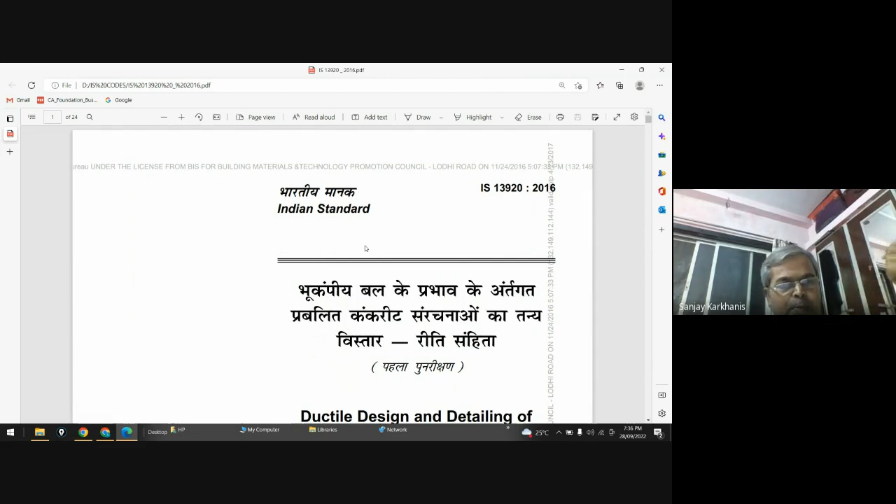So okay, let me see, it is somewhere here. This is 1893 and this is 13920. Okay. I think all of you may be looking. Yeah, this is Indian Standard IS 13920 2016. So that means in the year 2016, the recent development in that has been carried out. So you can see now. It is regarding ductile design and detailing of reinforced concrete structures subjected to seismic forces, and it's a code of practice as per Indian standards.

Okay, that means this whole thing will be directing you how to detail the reinforced concrete structure which is subjected to seismic forces. That means it is not talking anything about how to calculate the seismic criteria, etc. All that you will get in 1893. Okay. So ductile design and detailing. That means after your analysis, you will design the building, that means you will design the size of column, size of beam, then a layout, etc. Then you will give the reinforcement detailing and what will be the requirements for detailing. Clear? Yes or no? Yes, sir.

Yes, sir. So there is a basic difference between 1893 and 13920, because 1893 will let you know what are the codal provisions when you are supposed to create a structure for analysis for resisting the seismic forces. Okay, and this will give you, after analysis with the help of codal provision of 1893.

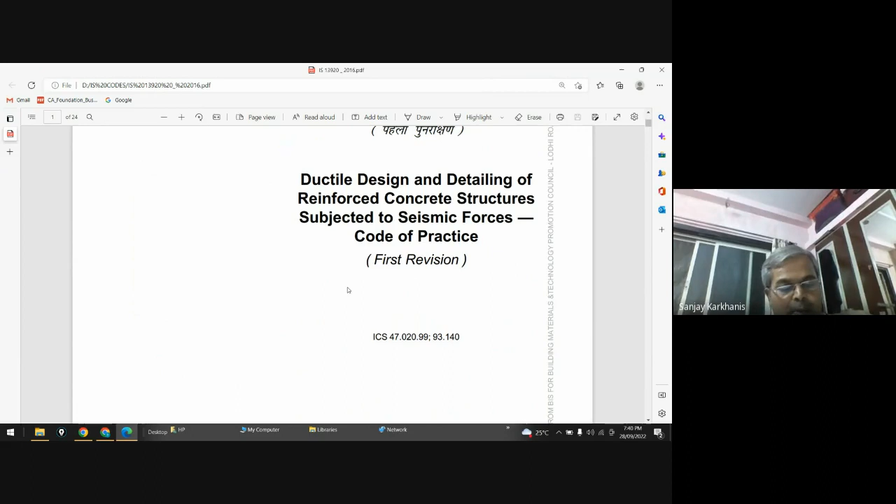Yes, clear, sir. Yeah, so if you are using R equal to 5, then you have to follow all these codal provisions, because unless and until you follow these codal provisions, your building will not perform in a ductile manner. It may perform in any other manner, that is brittle. It may get collapsed because you're designing the building for lesser base shear.

Clear? Yes, sir. And that is the first important thing, because I have seen a lot of people using R equal to 5, but they do not take care to design. They just follow the elastic manner design, where in elastic zone we say that the moment the force is removed, the building will come to its equilibrium position. That means there will be no damage. But here, because of R equal to 5 or R equal to 3, whatever R you are providing, in your assumptions itself you are saying that I'm not going to design the building to behave in elastic manner for 3 criteria.

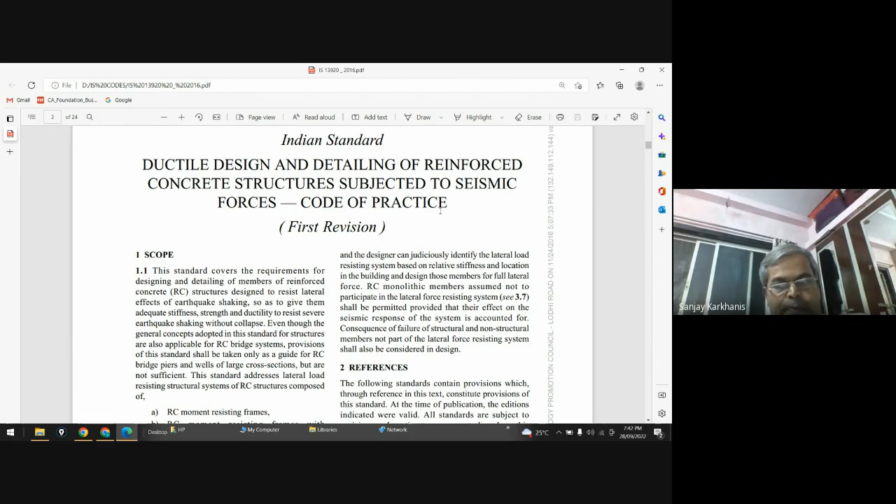So in the minor criteria, if the building is subjected to a minor earthquake, then it will behave in elastic manner. When it is resisting a moderate earthquake, some sort of damages I am accepting. And even if it is supposed to resist the severe earthquake, structural damage is also accepted, but collapse is prevented, right? Hello. Yes, sir. Yeah, and that's why there is a connection: the moment you use R equal to 5 in your calculation, you are supposed to follow all these codal provisions.

Now you can go through the scope, and you can see: provisions of this standard shall be adopted in all lateral load resisting systems of RC structures located in zone number 3, 4, and 5. That means the standard is optional in seismic zone 2. So in a low seismic activity zone, code says that you may follow these standards, or depending on your situation, you may keep it optional. But in zone number 3, 4, and 5, you are bound to follow these codal provisions.

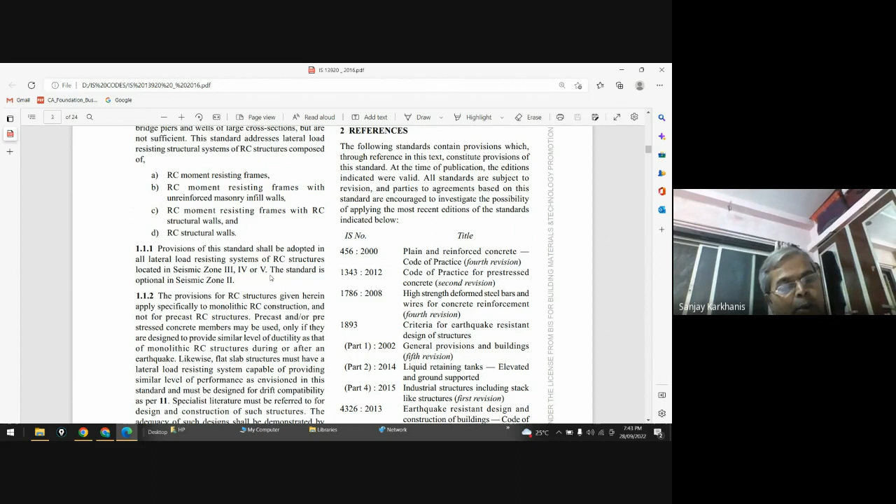Code says we do not make any prejudgment of what will happen when the building is subjected to moderate or severe earthquake. Building may perform in any haphazard manner, and it may be subjected to collapse. Okay. Then you can see the provisions for RC structures given herein. You can read all these things. That is simple. And these are, again, the references. Along with all these references, you have to read these codal provisions.

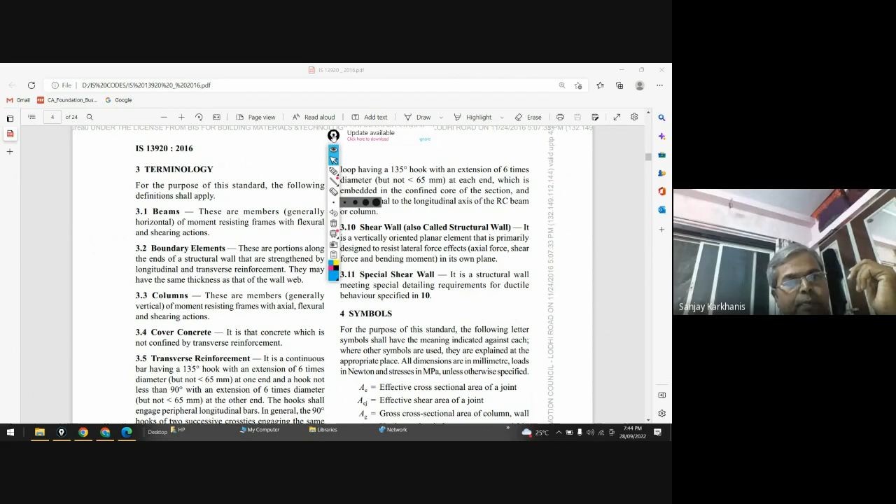Okay. Now this terminology, and this is very important. People do not read it, but I don't know why. You can see the first is about beam, and as per this standard, how the beam is defined. These are the members, generally horizontal. That doesn't mean that there may not be any other inclined type of beam. Generally horizontal, of moment resisting frames with flexural and shear actions. Yes, clear hua hai iska meaning? Yes, sir.

That means even if I have a member something like this, and this member is subjected to such lateral forces, it will be considered as beam. Or let's say this is your beam. Now this beam is subjected to lateral forces, maybe of any type, and it is predominantly resisting with flexural action and not axial load. Okay, now you can understand that.

Then boundary element. Now these boundary elements are in shear walls, which are vertical. We will go into that. These are the walls that are strengthened by longitudinal and transverse reinforcement. They may have the same thickness, or they may have additional extra thickness. That means if in plan I draw this as a shear wall, there will be a boundary element somewhere here, and there may be a boundary element somewhere here. So these are the two boundary elements. They may have a thickness as the thickness of wall, or they may have more thickness.

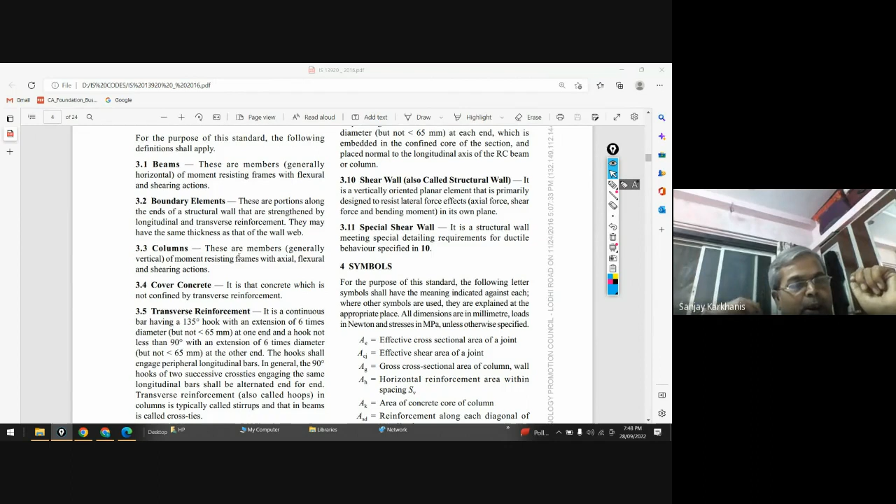Then you can see columns. These are the members, generally vertical, of the moment resisting frames with axial, flexural, and shearing actions. That means the column will be subjected to axial force, flexural action, and shearing action. All those members in the moment resisting frame will be considered as columns, and the members which are only subjected to flexural and shearing action will be considered as beams.

Okay, then cover concrete you can go through, and transverse reinforcement you can go through.

Now, gravity columns in buildings. You can say that all columns will carry the gravity loads. Then why is this special consideration? It is a column which is not part of the lateral load resisting system, and is designed only for force actions, that is axial force, shear force, and bending moment due to gravity loads only. But it should be able to resist the gravity loads at the lateral displacement imposed by the earthquake forces.

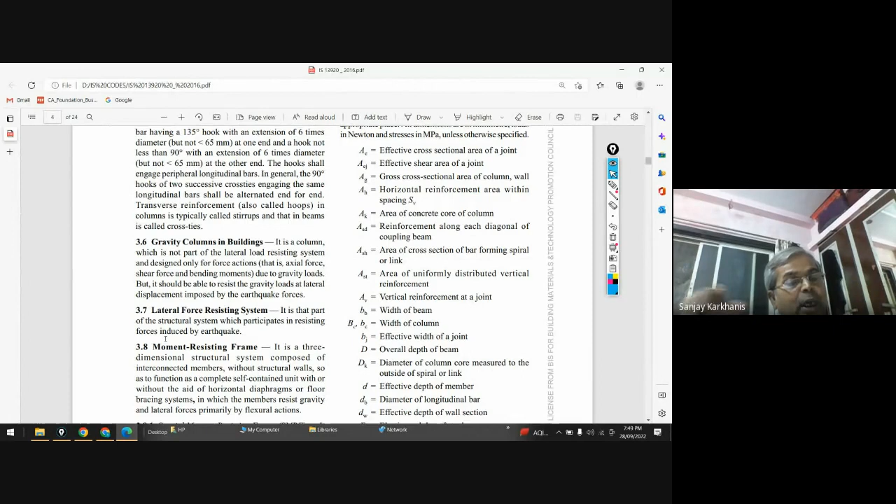So in high-rise structures, some columns you may consider only to resist the gravity loads. They are not part and parcel of the lateral load resisting system. Clear, or do you need a bit of explanation? Yes, sir, we need that.

See, this is your entire building. Let's say this is the plan of your entire building. Then there will be some cores, you can say these are the cores, and there will be some lateral columns over here, maybe some columns over there, I'm just drawing some columns. Now all these periphery columns, along with this lateral load and this shear wall, you will have a structure which is connected.

So this inner core wall is connected to all these lateral load resisting systems. Let's say it is connected, and there may be a few columns, these are the columns, but I have a choice that I will say these columns will resist only gravity loads. They are not going to resist any lateral load in this direction or in this direction, because lateral loads will be coming at the floor level, and this floor level, with the connected beams, will transfer the load onto these lateral load system vertical elements, these columns, then this wall.

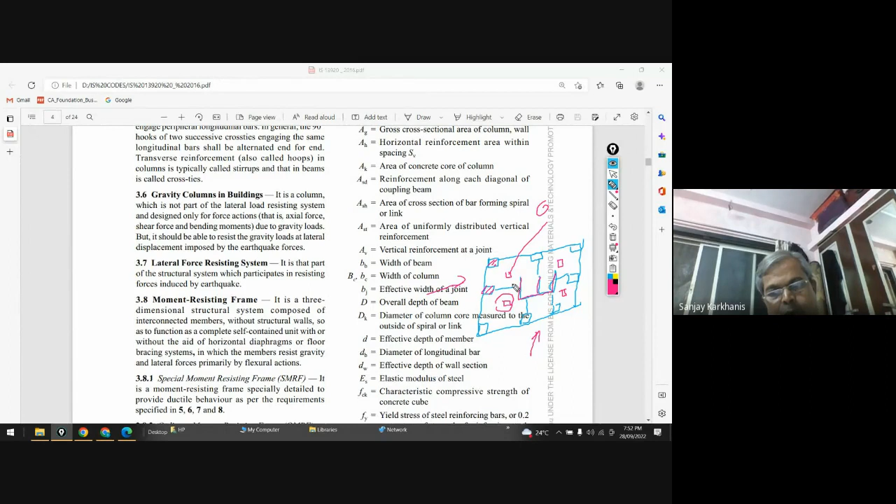But these columns may not contribute to transferring any lateral load. They are good for gravity loads; they will transfer the gravity loads to the foundations, but they will not take part in the resisting system. So that is called a gravity column. Clear? Yes, sir.

Now the reason behind that, let's say you're having a 50-story structure, and if all the columns you're creating are supposed to resist the lateral loads, then the sizing of the inner columns will be very high, and that will obstruct your architectural use or access, etc. So the system is created such that these will be the gravity columns, and remaining columns will form only as a gravity load resisting system. So they will be of smaller size, but they will not contribute in resisting the lateral loads.

All lateral loads will be resisted by the shear wall, inner or outer periphery, or some columns which are supposed to resist them. So in the moment resisting frame, these columns do not have to resist the moments that come due to the lateral load, and that's why they are separated.

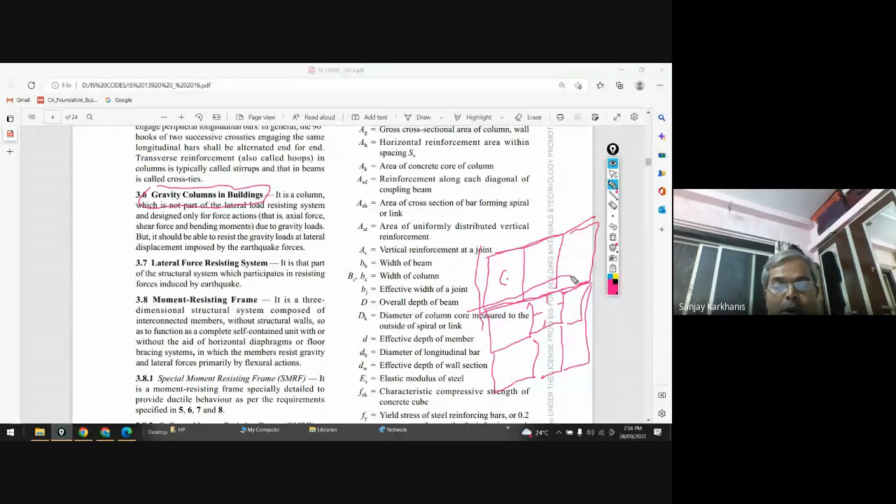The books are also available on the net, or you can go through J.D. Butch. There is one more reference that I am giving you - the man called J.D. Butch.

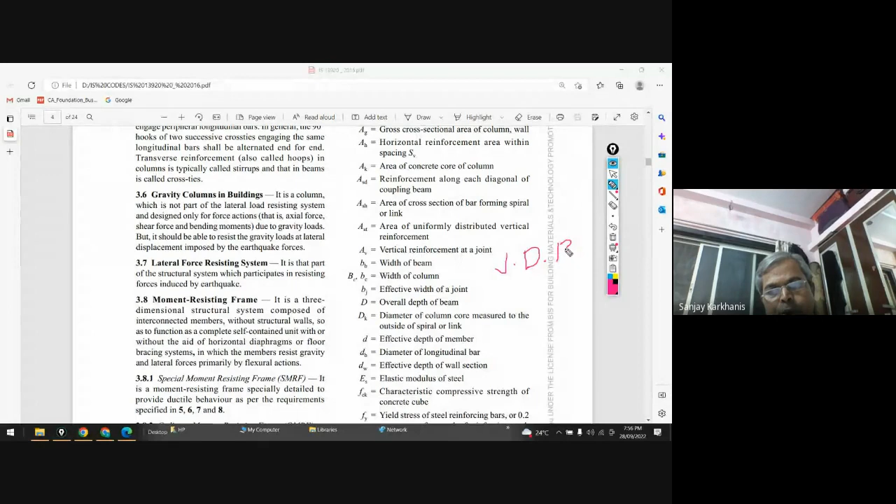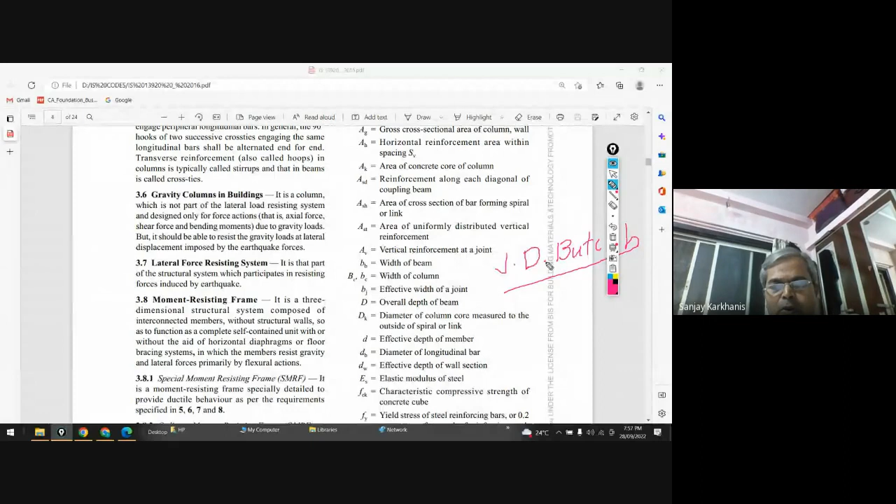You can go through this book. We are not interested in finding out those complicated formulas and design. We are not going to design a 110-story structure, but you can go through it to understand how that resisting system is created. If you go through the entire book, you will find that structural engineering is very simple, and everyone can understand it, provided you have that attitude. It does not need any rocket science. You need not be Einstein, but you can understand it. And that's why we have shared that book by Dr. J.D. Butch. So there you will understand gravity columns and lateral load resisting system columns.

You can see here, lateral force resisting system - it is the part of the structure system which participates in resisting forces induced by earthquake. The members which are vertical members, part of this lateral load resisting system, are also a part of the gravity load system.

Now the moment resisting frame - it is a three-dimensional structure system composed of interconnected members without structural walls, so as to function as a complete self-contained unit without the aid of a horizontal diaphragm. So only the frame will take care of whatever lateral loads are coming to that building. This horizontal and vertical bracing, or you may call it a bare frame, will take care of how to resist those lateral loads without creating any bracing system. So that is called a moment resisting frame.

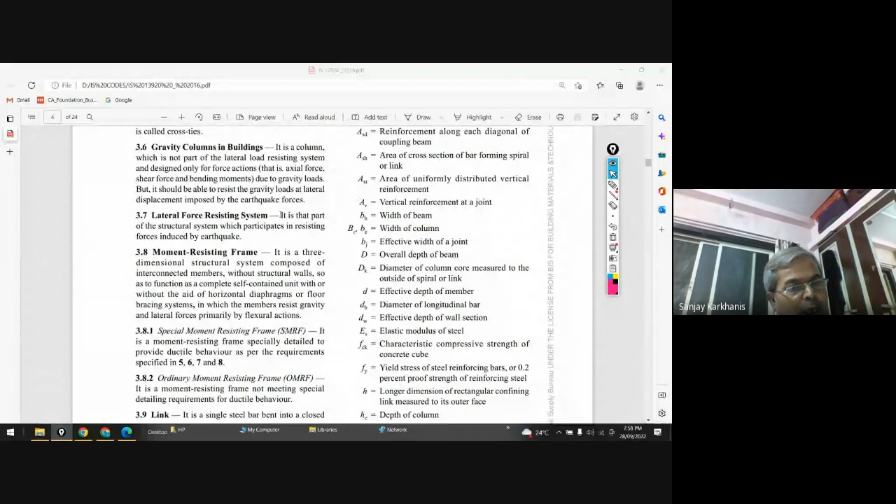Or you may say that whatever frames you are using up till now, they are a simple moment resisting frame. And then there are some special moment resisting frames which are specially detailed to provide ductile behavior as per their requirement. We'll see that. Then there is one ordinary moment resisting frame. So moment resisting frames compose of two terms: special moment resisting frame and ordinary moment resisting frame.

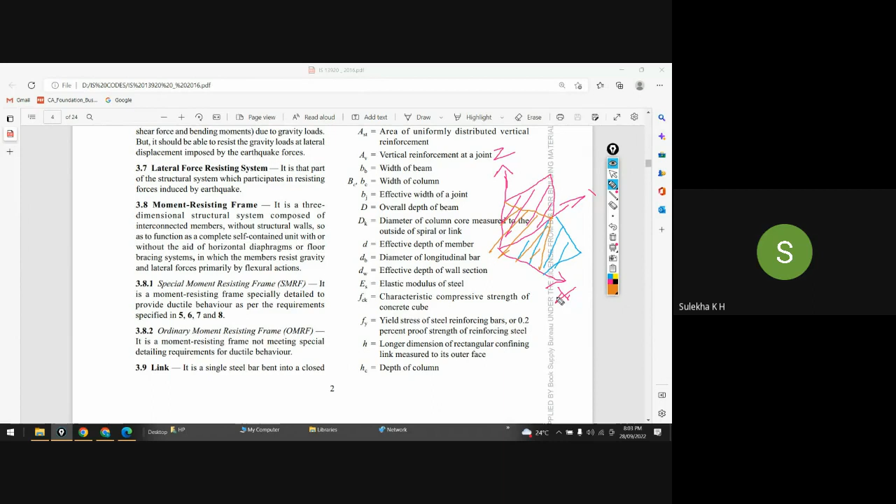Clear? Yes sir, clear, in the plane. Now, if I say that YZ plane, then that YZ plane will resist the forces in this direction. Then XZ plane will resist the lateral loads in this direction, like that. Yes sir, so that is in the plane.

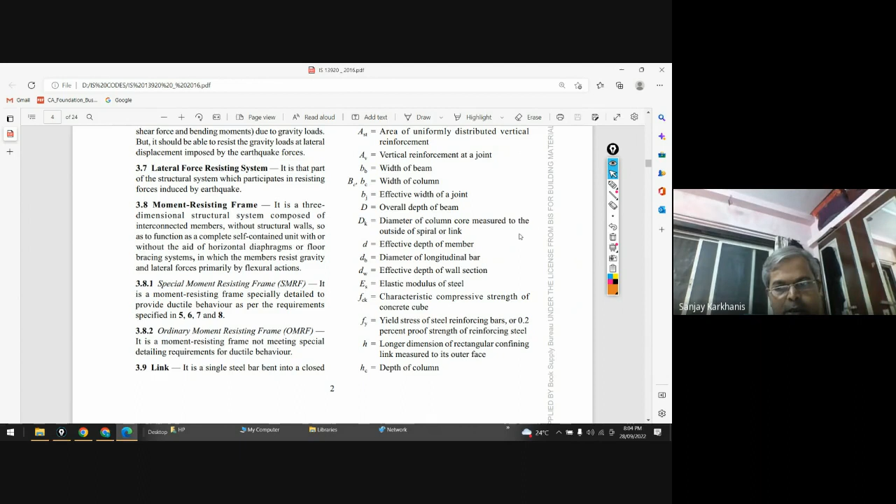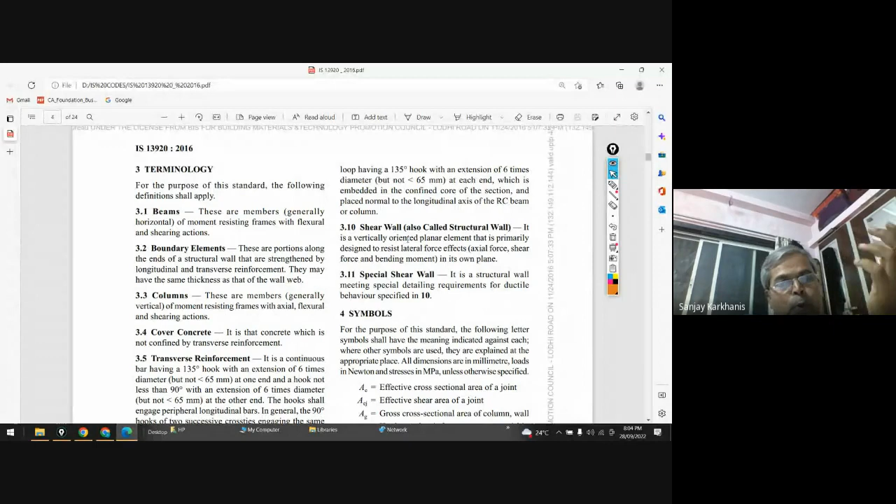Yes sir. We'll see when we'll be going through our ETABS model. We'll see that, and at that time this in-plane forces and out-of-plane forces you will come to know more. But I think I have discussed it while I was going through that ETABS tutorial.

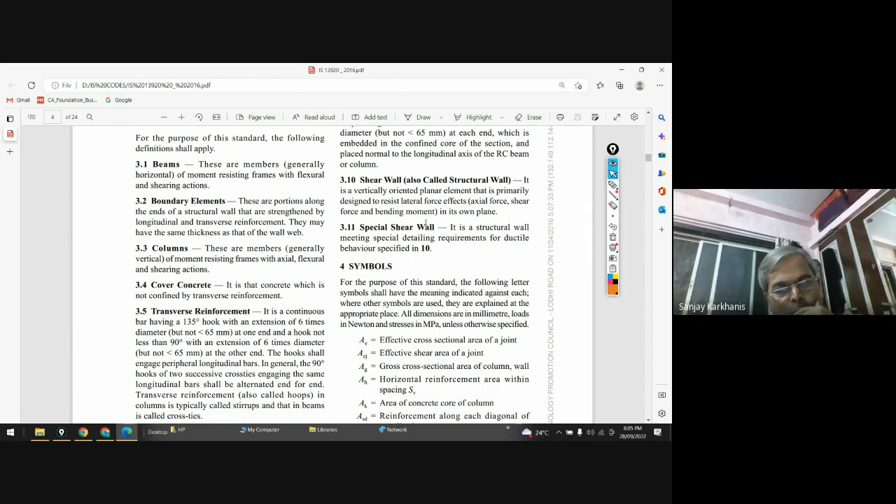Okay, then special shear wall. Now it is a structural wall meeting special detailing requirements for ductile behavior. And for that you have to go to this 10. So right now we are at 4. 3.11 says that if you want to see more about special shear wall, go to that 10 number note, and there you will find what is special shear wall. Okay, and then you can go through the symbols.

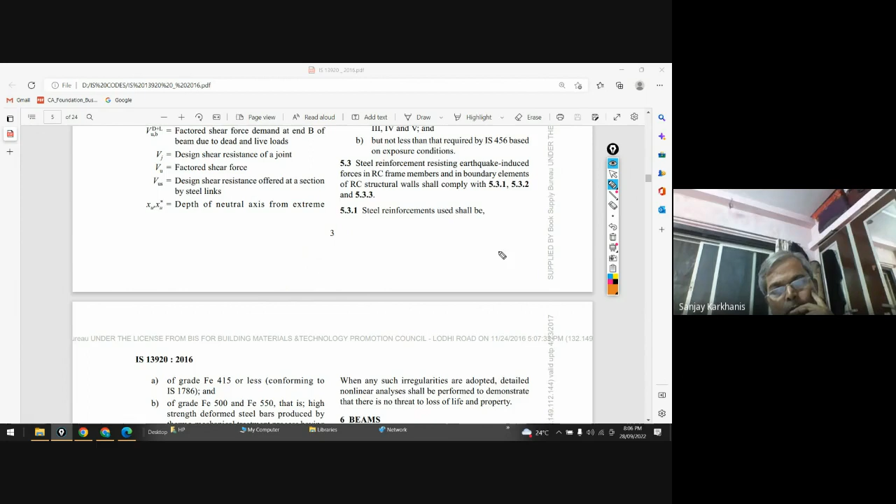And now starts your fifth, general specifications. Now just we'll go through basic things. What is meant by ductile? I think you know what is the meaning of ductile. Anybody? What is the meaning of ductile?

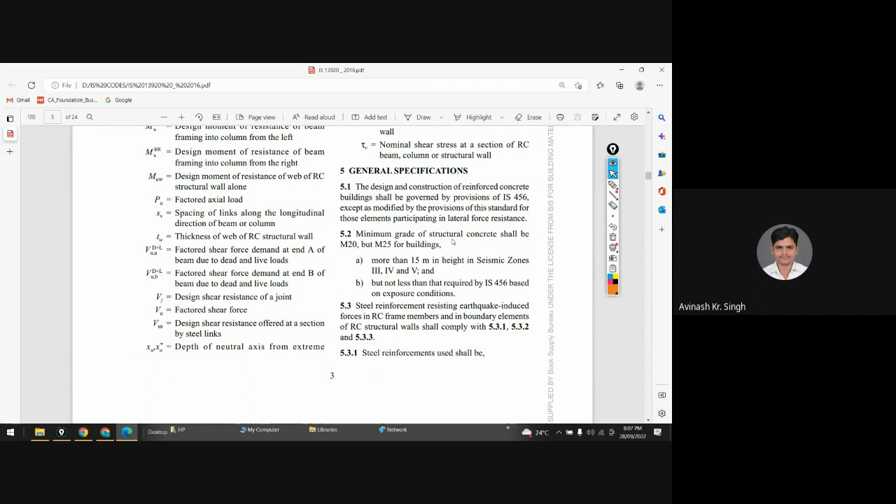Now let me give you a basic idea about ductile. See, you can go through the technical definition, but the concept behind it is that let us say a beam is overloaded. So what will happen? It will fail, right? Yes sir, it is much more overloaded than its capacity.

Then the result is the same, that it is going to fail. Now, how that beam is failing will determine whether that beam is ductile or not. So there are two ways: either the beam will fail in a ductile manner, or the beam will fail in a brittle manner. Is this clear? So the failure pattern will decide whether it is ductile or not.

So if you go on increasing the forces on a beam, definitely every beam has its capacity. Beyond its capacity, it cannot sustain. Yes, and that is the law of nature.

Suppose I am training you, let us say I went on giving you the session for one hour, two hours. Now you are having the capacity to bear that for two hours. But let's say three hour, four hour, five hour, the things are going on. Finally, you will conclude and you will break, right? Now that breaking pattern will decide the quality.

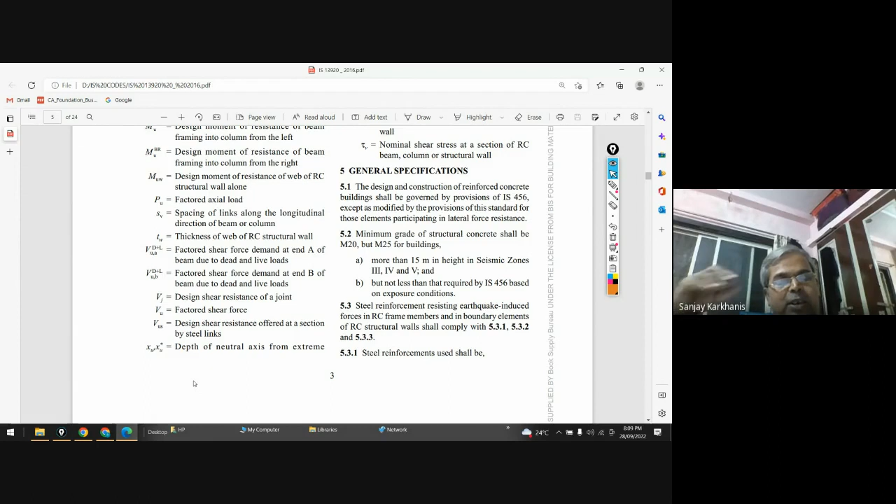Then a time, it is not sudden, it will give you enough warning, and it will start yielding before finally failing. Clear? Yes, sir. Now you must have understood what is the difference between ductile failure and brittle failure. Both are failures, 100%, because we are talking about failure. So both are failures, but in brittle failure, the things come suddenly.

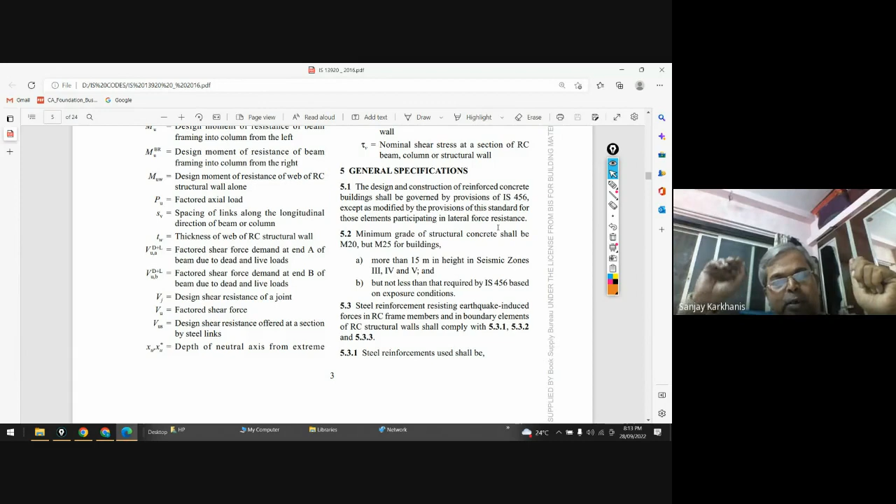Now you can imagine that if you have a chalk in your hand and you try to bend it, it breaks immediately. That is a brittle failure. And let's say you are having some sort of rod, and that rod you start bending, and then that rod gets bent, but it doesn't get cracked and in pieces. That is called a ductile failure. So we are trying to encourage ductile failure, and we prohibit the brittle failure through these codal provisions. Clear? Yes, sir.

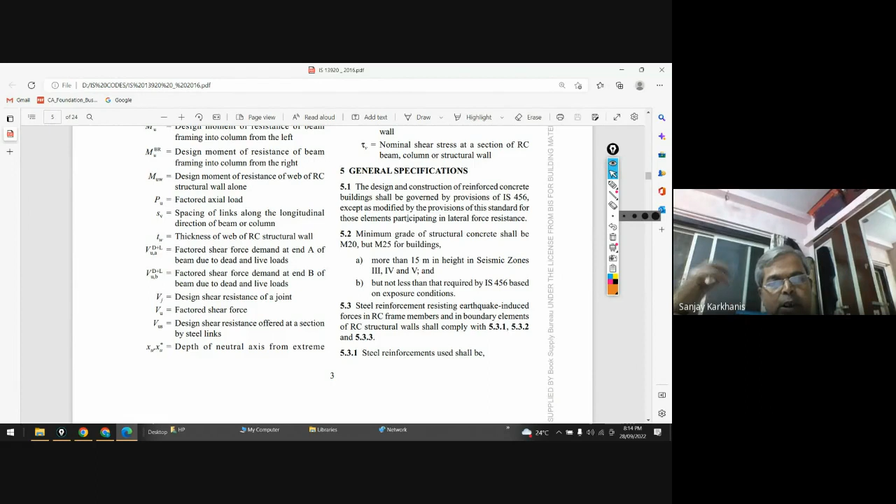Now you can see the general specification, the design and construction of reinforced concrete. Now, why does reinforced concrete need ductile detailing? Because concrete itself, as a material, is a brittle material. Why you don't have any codal provision to have a ductile failure for steel structures? Because steel itself is a ductile member. So if you are making a frame of steel structure, let's say columns and beams and bracing, etc., it is definitely a ductile structure. So it doesn't need any ductility to be added into it.

Ductility is to be added in reinforced concrete because concrete itself is a heterogeneous material, and that's why it is a brittle material and it will fail in brittle manner, and we don't want that. That's why we are making it a ductile behavior detailing, and that detailing is provided with the help of reinforcement. Clear? Now you can see the design and construction of reinforced concrete buildings shall be governed by provisions of IS 456, which you have to use, except as modified by provisions of this standard for those elements participating in lateral force resistance. That means gravity columns, you don't have to provide these ductile detailing. Okay.

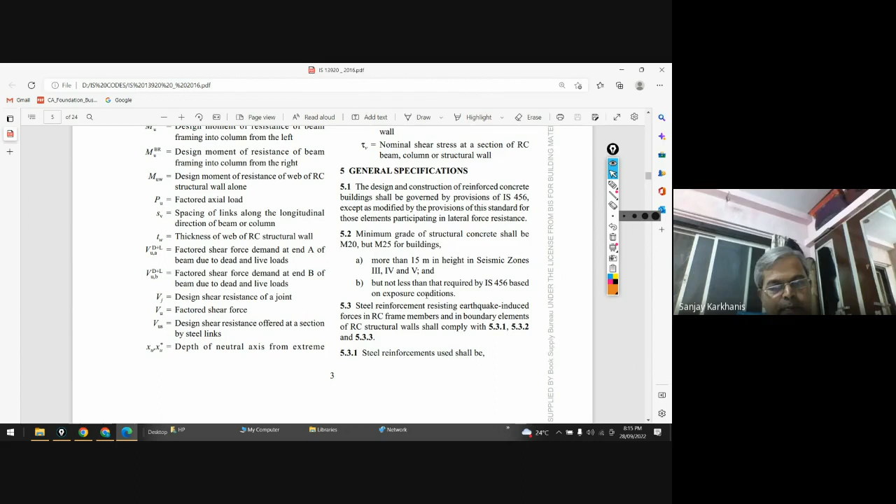Okay, then you can see the minimum grade that the code has provided is M25 for buildings having height more than 15 meters in seismic zones 3, 4 and 5. That means in zone number 2, you can use M20. Clear? Yes, sir.

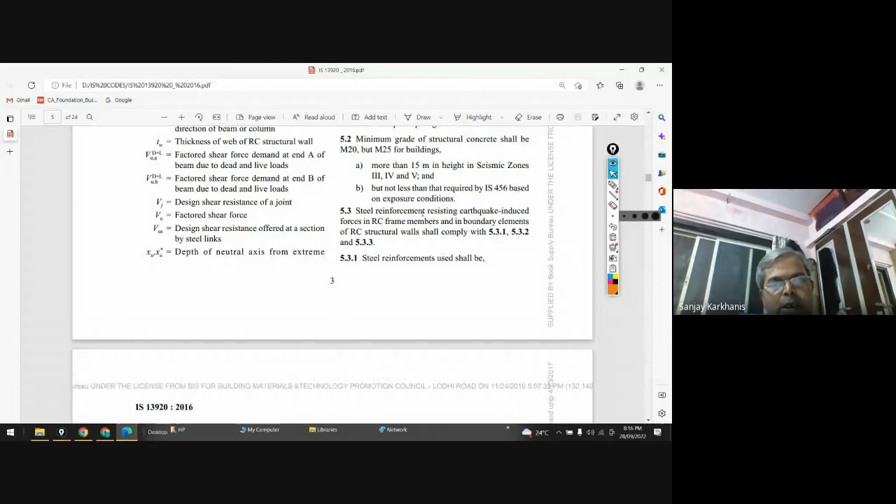And then as per 456, वो तो आपका 456 का जो requirement है वो तो आपको करना है. अगर 456 में you design a building for grade M20 and the building is having height more than 15 meters and it is located in zone number 3, 4, 5, it is not allowed. You have to go at least for M25. That is the meaning of this clause.

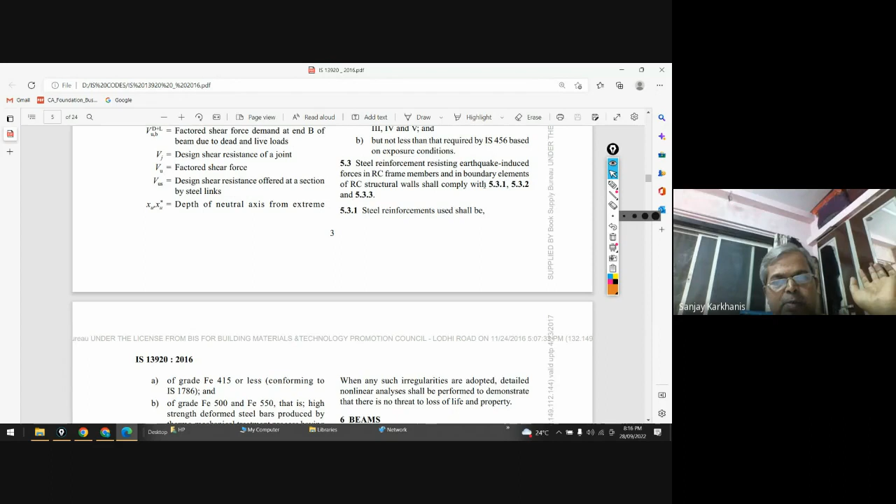Okay, steel reinforcement resisting earthquake-induced forces in RC members and in boundary elements of RC structural walls shall comply. Now here you can see the reinforcement that you are using shall be Fe 415 or less, not more, conforming to IS 1786.

And you can see here for grade Fe 500 and Fe 550, that is high strength deformed steel bars produced by thermomechanical treatment process having elongation more than 14.5% can be used. Otherwise, you have to go for less than 500, that means Fe 415. This is very important. So if you are using Fe 500 for lateral load resisting structures, then you must have TMT bars. Clear? Yes, sir.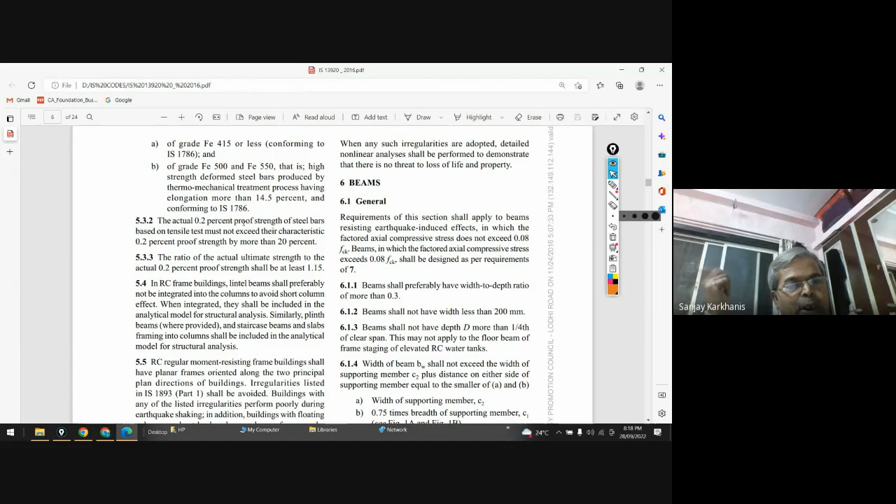Then actual 0.2%, you can read this. This is a little bit complicated, and unless you go through the stress-strain behavior of HYSD, you will not understand this 0.2%. Anybody interested how this 0.2% is coming as a proof strength? Anybody knows it? No, sir.

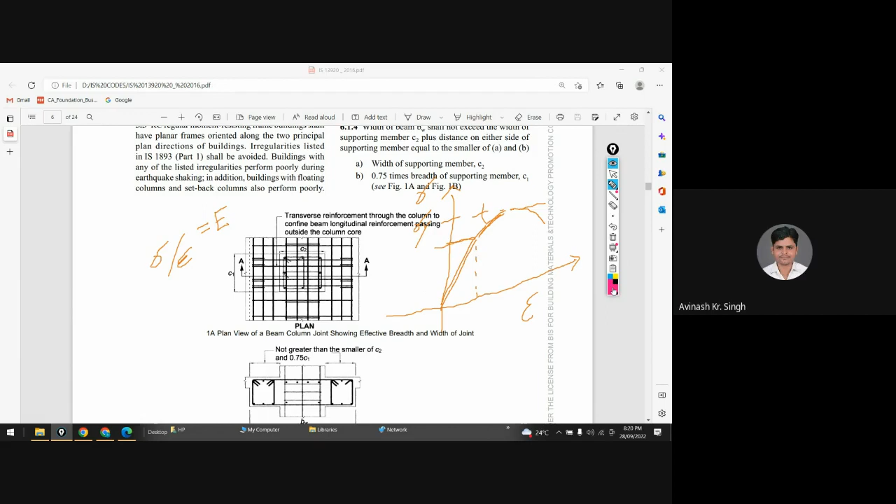See what happens if I stress the element up to this point, then this is my strain, and the moment I release the stress, it will come to zero, and that is what we call elasticity. The bar is subjected to tension, it gets elongated, and the moment the tension is removed, it comes back to its original position. Yes, Sameer, this is what you were talking about.

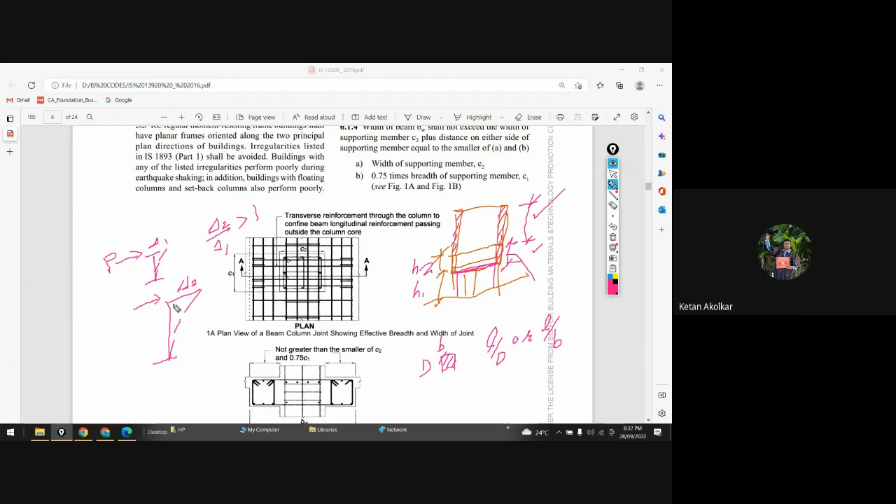So if I call this delta 1 and this as delta 2, you will see that delta 2 will be more than delta 1. Yes, sir. That means this force is not that way resisted by this long column, but it is resisted by this column.

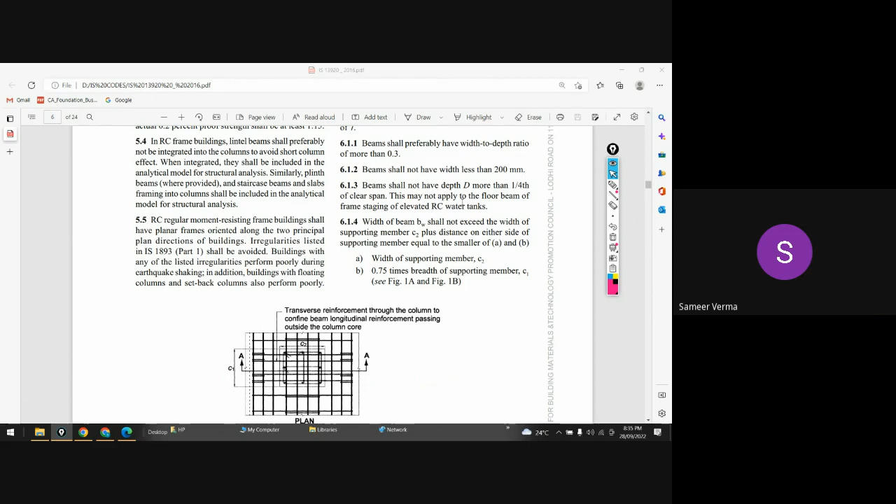You have to make sure that your building configuration shall not create short columns, because short columns attract more lateral force, and they try to resist them locally.

We need the overall picture. If there are 100 columns, the building will behave properly when all 100 columns are equally resisting the total VB. Let's say 1000. So every column will say, okay, I will resist 10 kilonewton. The remaining will be resisted by someone else, and together we are contributing to a resistance up to 1000 kilonewton. Clear? Yes, sir.

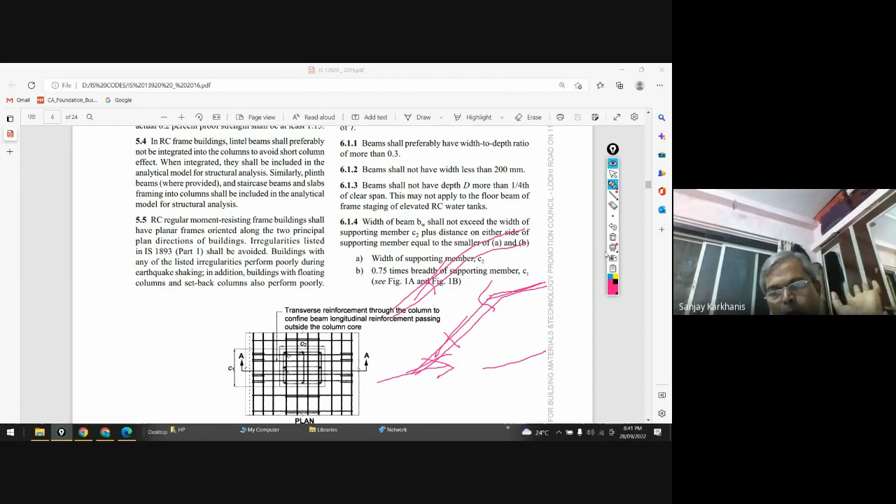Code says that these ramps also should be separated because these ramps create a force here and there will be a force here, and they create imbalance in the entire structure. Code says that you have to take care that the ramp, staircase, all these units which are interconnecting one floor with another floor shall be preferably separated from the main structure. And that is what the code says, preferably.

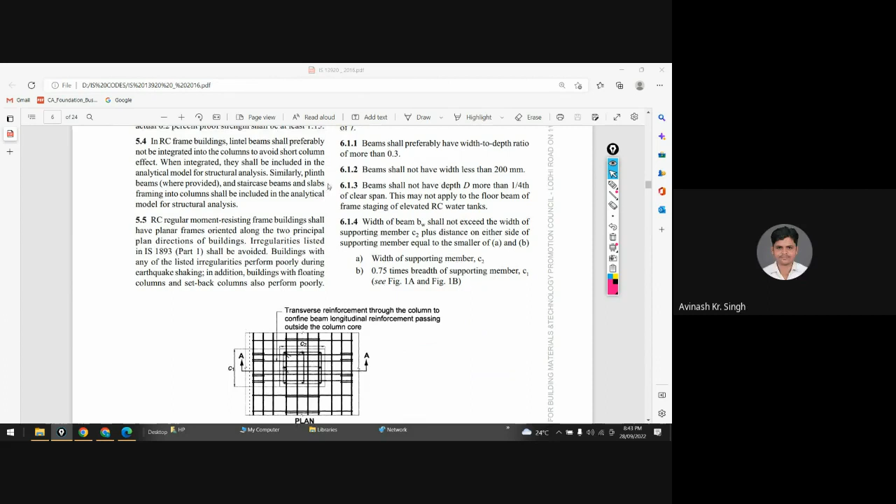Whatever in the design of those staircase columns which you are finding as a short column. Okay, we'll go ahead. Then RC regular moment resisting frame buildings shall have planar frames oriented along two principal plan directions.

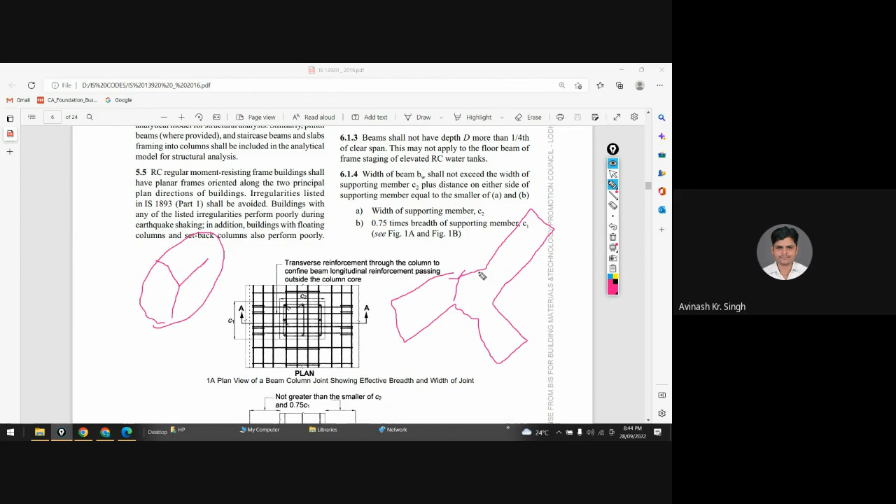Burj Khalifa. Yes. Burj Khalifa. Yes, you are 100% right. Burj Khalifa.

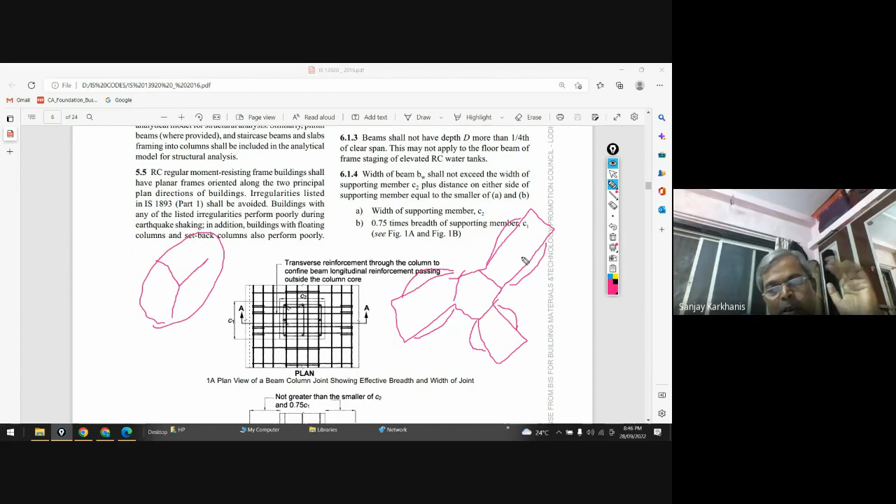But in terms of a major and severe earthquake, that behavior cannot be predicted. I'm not saying it will fail, I will say that the behavior of that building under moderate or heavy lateral forces due to seismic activity, the performance or deformation behavior of the building cannot be predicted. वो बहुत complicated है, and as a civil engineer we don't like complications. We are very simple people.

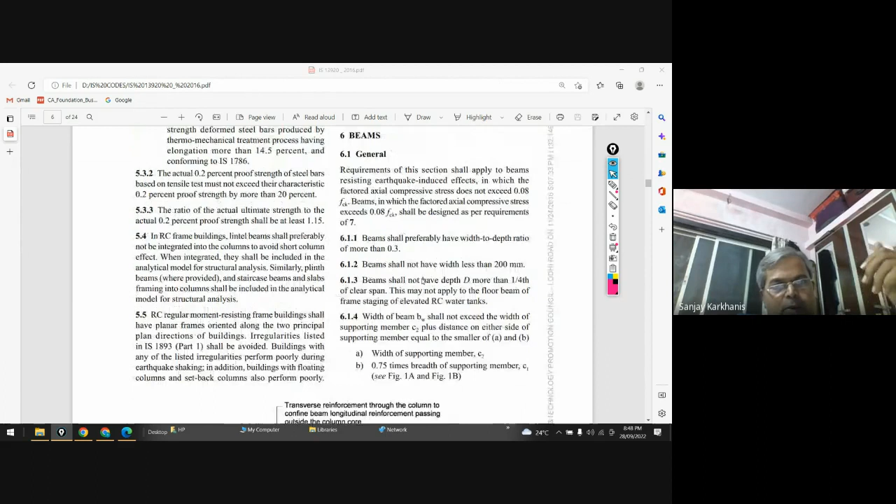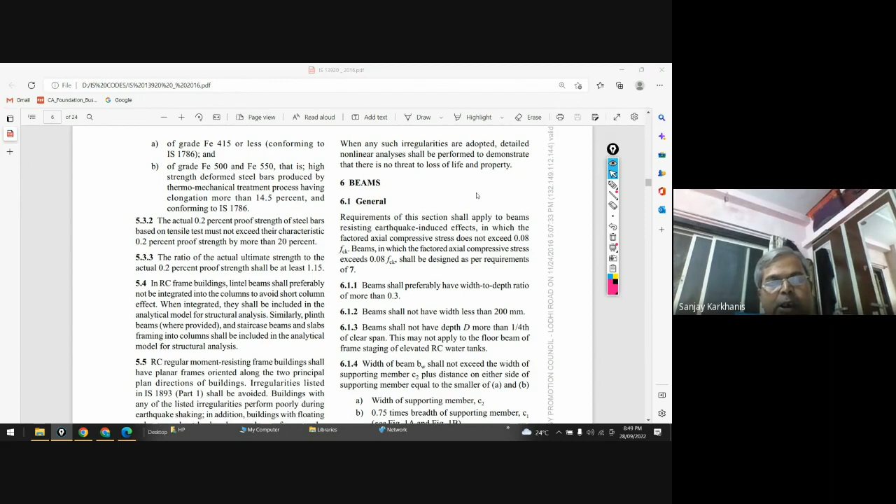Okay, so that is again a different issue, but let us go through some simple things. So how to come across these irregularities, you will understand only when you start designing simple structures. अब सिंपल स्ट्रक्चर ही नहीं आता तो कॉम्प्लिकेटेड में कहाँ जाएंगे ना? तो पहले अटेम्प्ट हमारा ये रहेगा कि let us go with simple things.

Okay, then you can go through this beams general. Now you can see over here, the requirement of this section shall apply to beams resisting earthquake induced effect in which the factored axial compressive stress does not exceed 0.08 FCK.

Now what is the meaning of this? Anybody? सोचना पड़ेगा ये इसका मीनिंग क्या है एक्चुअली। और जब नहीं समझता है ना तो पिक्चर निकाल के सोचने का अटेम्प्ट करना, शायद आपको क्लियर हो जाएगा, शायद नहीं होगा, मगर ये अटेम्प्ट करते करते you will start developing yourself as a structure engineer.

See, this is a beam, and now what this clause is saying is earthquake induced effect in which the factored axial compressive stress - that means the force is applied like this. Let's say this is my force P, and this is P, acting in compression. Now he is saying compressive stress - that means I don't have to apply force, I have to apply stress, so I have to divide it by P by A, where A is this area. Clear हुआ? See how I am solving the problem.

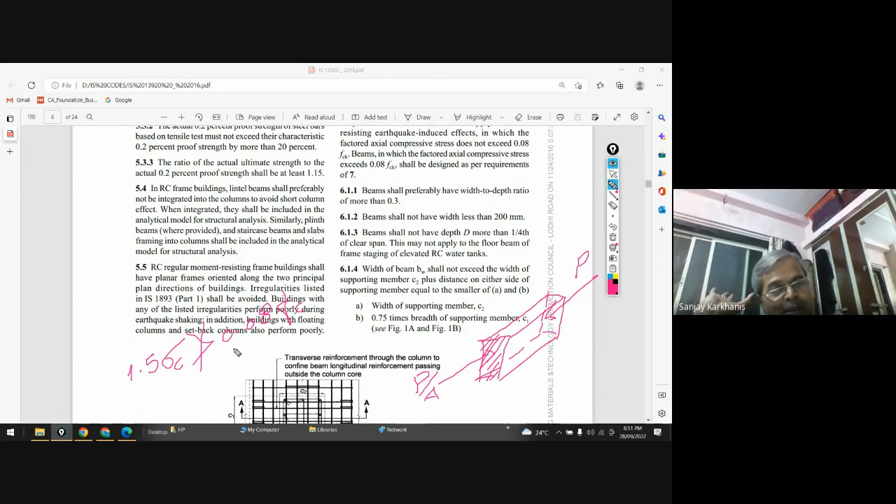Now you can see this is indirectly saying that the beams are not supposed to resist axial forces. Clear हुआ? See, let us consider FCK equal to 25. Now 25 multiplied by 8 by 100, that is 0.08. So 25 divided by... 4... into 2. Now what is this 2? 2 Newton per mm square, because FCK is in mm square.

Yes sir, now he is saying that 1.5 sigma C shall not be more than 2 Newton per mm square. That means what? Sigma C shall not be more than 2 divided by 1.5. That means what? Yes, 1.33.

So finally he is saying that P shall not exceed 1.33 B into D. Right? That means very, very little axial force. Clear?

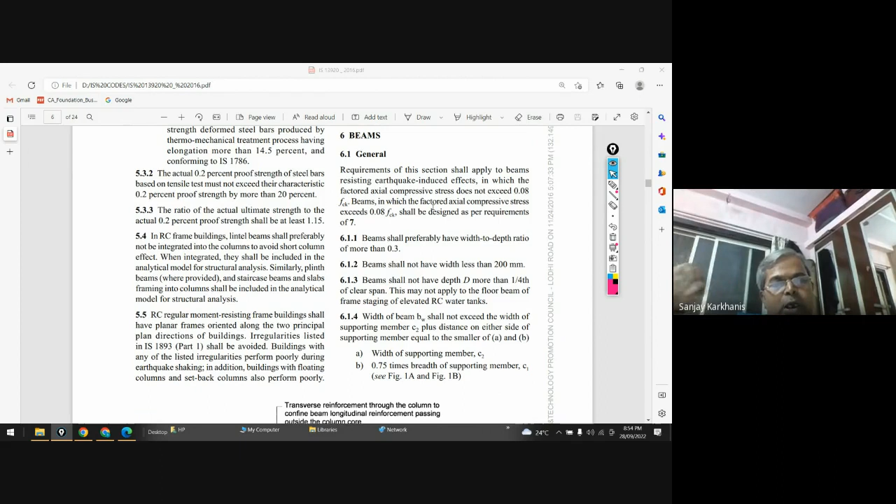Indirectly he is giving you that if there is an axial force there, its amount should be very low. Now suppose this is not in our hands, it will come from analysis. Now what will happen if your sigma C, or whatever that factored axial compressive stress, exceeds this 0.08 FCK? What to do? Increase the size.

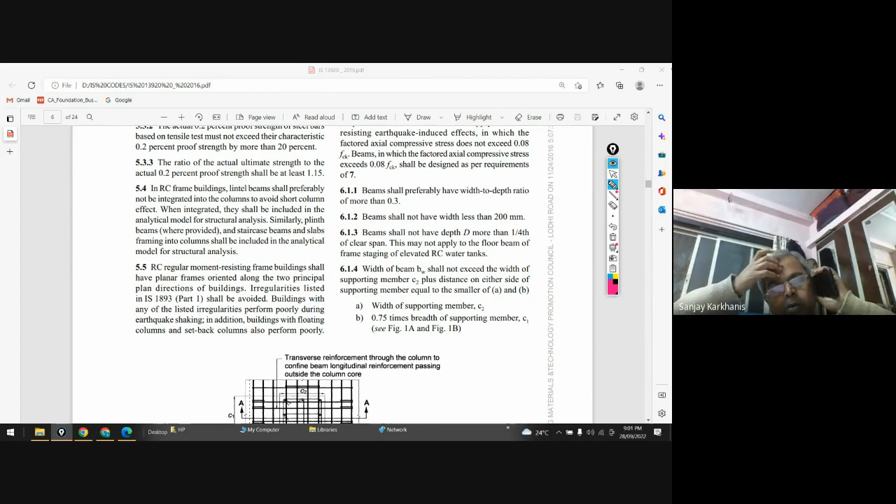Okay, so see what will happen if I make a slender structure something like this.

Okay, in this direction it is okay. But as you are creating a 3D structure, what will happen if the forces are coming in this direction? It will bend something like this.

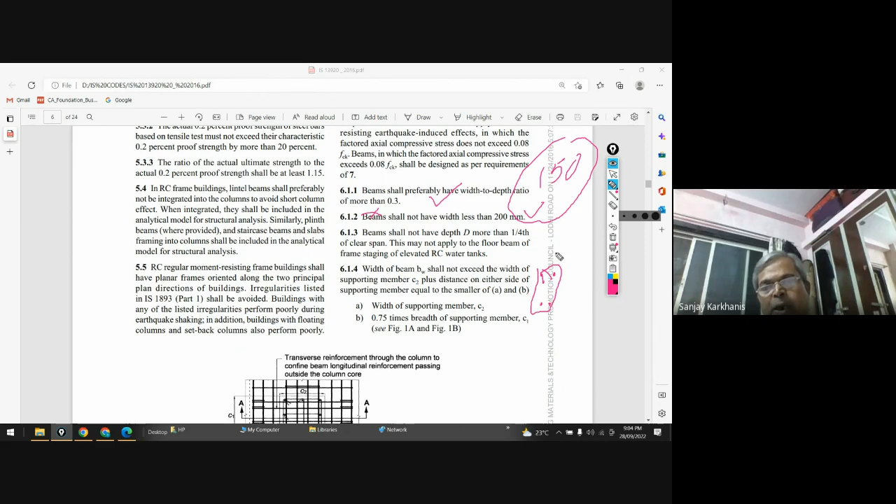So what will happen with 200? I can go only 200 by 600, right? Cannot go beyond 600, even 750. 200 by 750 - find out the B by D ratio and check it over here.

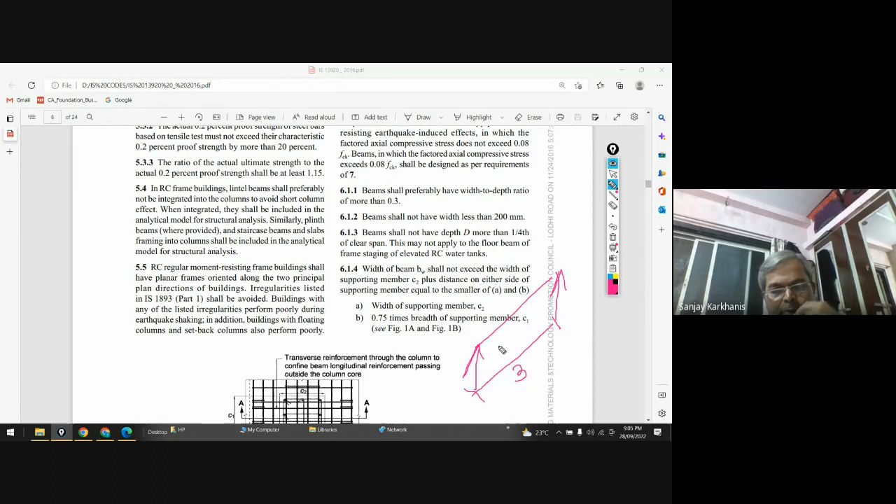This is your span, this is your beam, and this is your span. Let us say the span is 3 meters. Yes, are you getting it? Yes sir, yes sir.

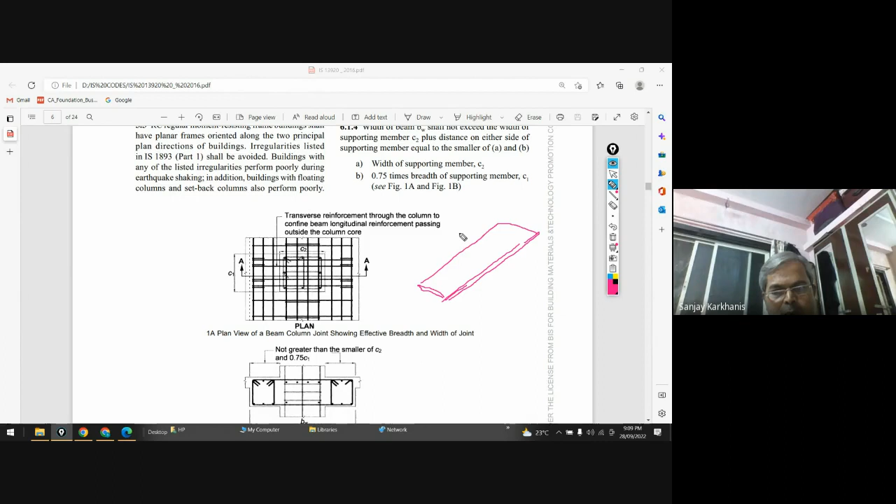See, this is my scale. And I'm applying a load over here. So it will bend. Yes, yes sir. And let us draw another picture.

The same scale. Yes. Support and load. ये bend होगा? No, sir. It will need, वो bend होने के पहले ये shear होगा. Yes, sir.

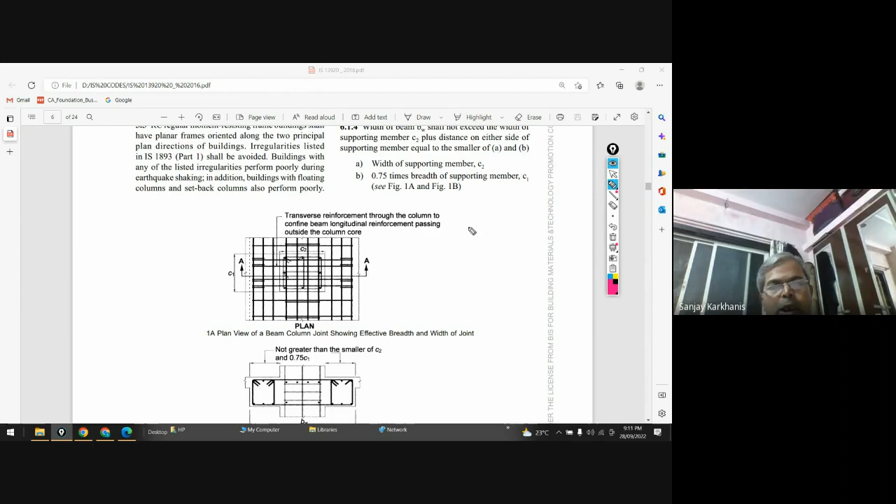And what we are doing, the basic idea is that we want to encourage flexure and we want to decelerate the action of torsion, action of shear, right? Clear? Yes, sir.

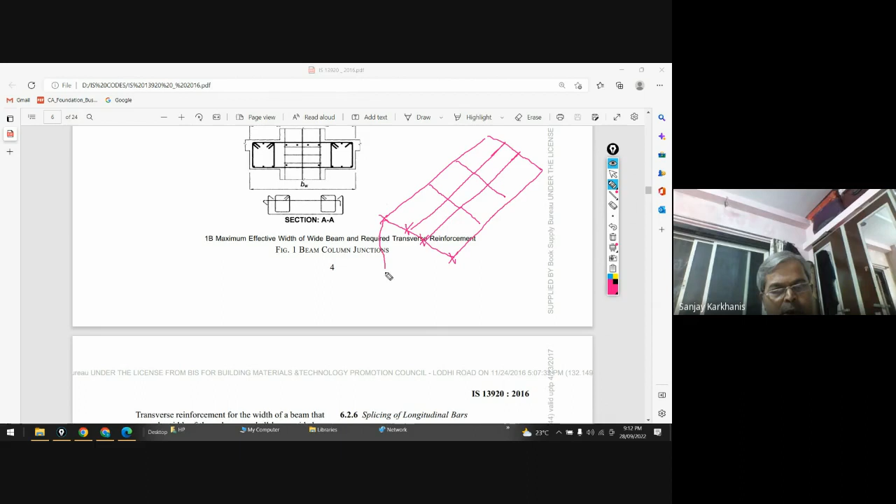Now the problem, where is the problem? Let's say you are having a structure something like this. So you are having a column over here, a column over here, a column over here. Let's say it's a hostel building with this passage, and this is a room, this is a room, this is a room, this is a room, and this is a passage, and you're creating columns. Yes. Now we are having the same depth.

Let's say this is 5 meter, this is 5 meter, and this is let's say 1.5 meter. So for 5 meter span, you may be needing something around say 600 depth. So you are providing a 600 depth over here for beams. So this is a problem, because now 1500 divided by 600, L by 4. So it is not as per the clause. So what you will do?

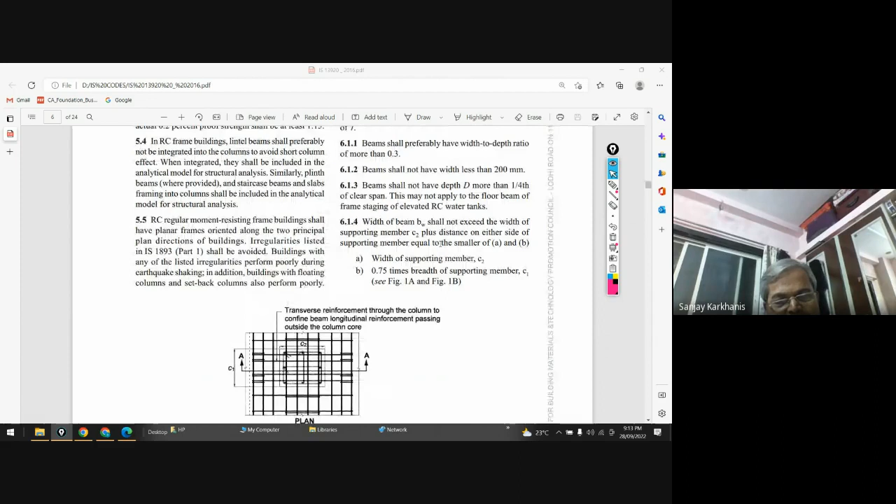So this is the basic thing that as a structure engineer, right in the beginning, you have to create, so that you will not fall in the traps. Actually, these are not traps. These are the guiding lines how you should develop your supporting structure. क्योंकि 4 कॉलम किसने लिए? आपने लिए ना? तो 4 के 3 हो सकते हैं ना. The one span will be 7.5, another span will be 5. You can design the 2 span continuous beam. Why you need additional column over there? That is how you have to develop your structural framing ideas before going for any calculation.

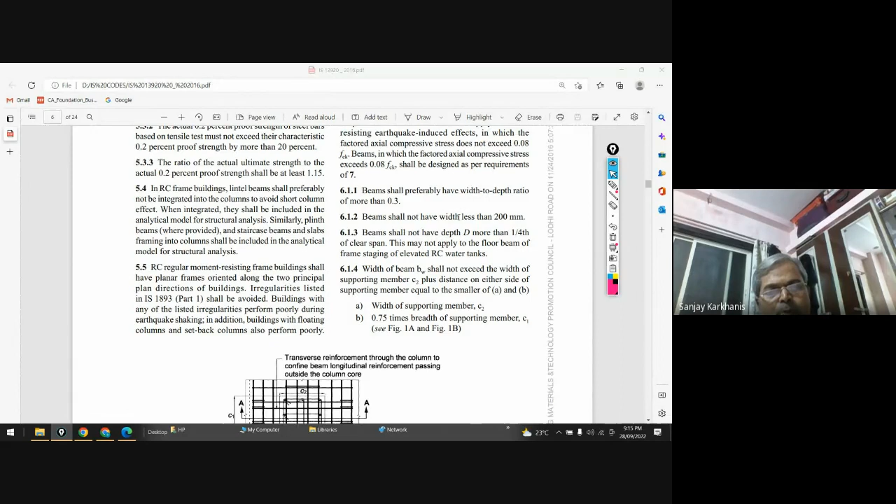यहाँ पे हमने कुछ calculation नहीं किया. We have not found any loading due to slab, dead load, live load. We have not done anything. But right in the beginning, we say that ये problem आ जाएगा. Remove that column. Not required. So we'll design the beam for 7.5. Not 7.5, actually it's 6.5, 5 plus 1.5. So we'll design that for 6.5. Another beam for 5. That will take care of everything.

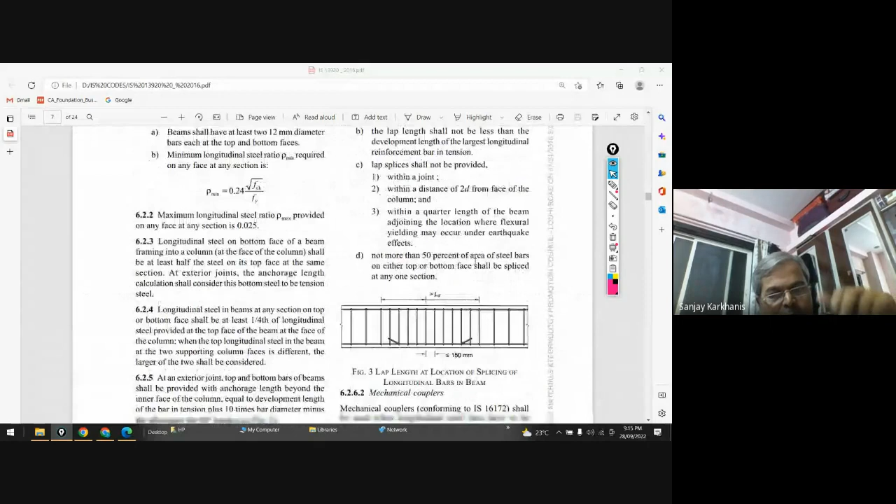So I think with this, I will conclude today's session. And I think we need one additional session so that I can go through this. But today I went through the basic ideas. And I think these ideas, nobody will tell you. Everybody will just say that follow the code, and you will say that sir code follow किया तो design ही नहीं होता है. बराबर है ना?

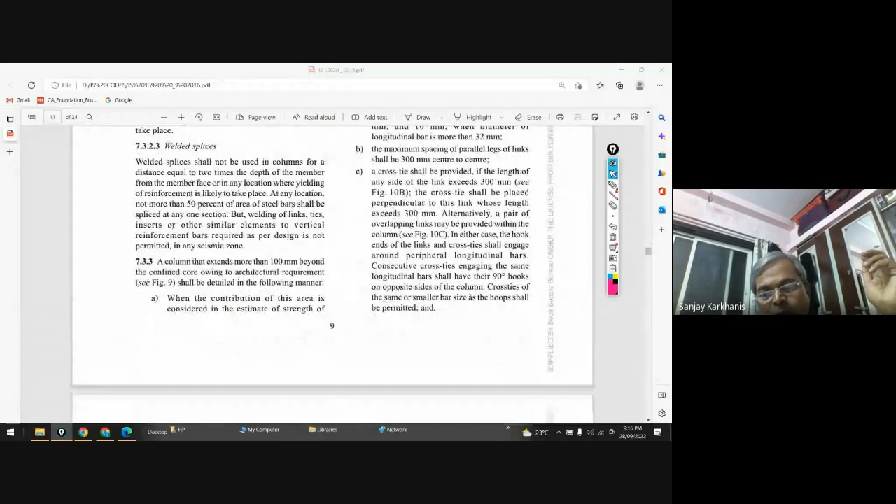Or they have gone through. You can see this. Association of Consulting Civil Engineers, Bangalore. Atomic Energy Regulatory Board, Mumbai. Bharat Heavy Electricals Limited, New Delhi. Building Materials and Technology Promotion Council, New Delhi. CSIR, Central Building Research Institute, Roorkee.

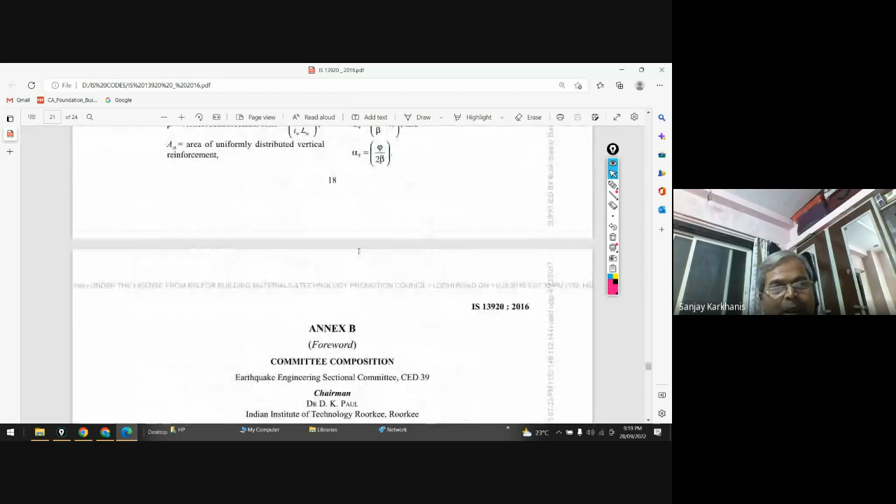So just get rid of that hypothetical concept. People say that code has been written by the people who do not have a practice, practical knowledge. ये प्रैक्टिसिंग नहीं है लोग. ये आपको क्या लगता है? ये लोग प्रैक्टिसिंग नहीं है.

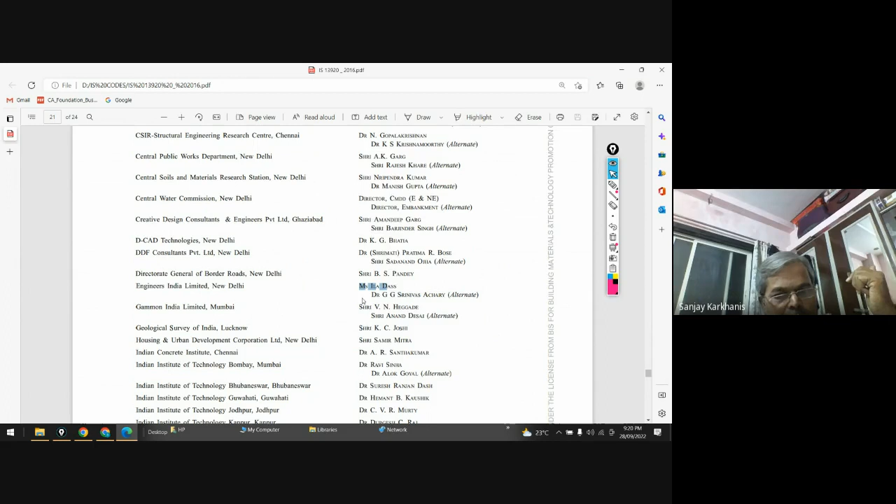वहाँ पे विमला, अल्पना सेट, let me see that. It's somewhere. Yeah, this, Engineers India Limited. Where is that? Yeah, Ila Dass and one more. I know that Alpana. I'm not getting it.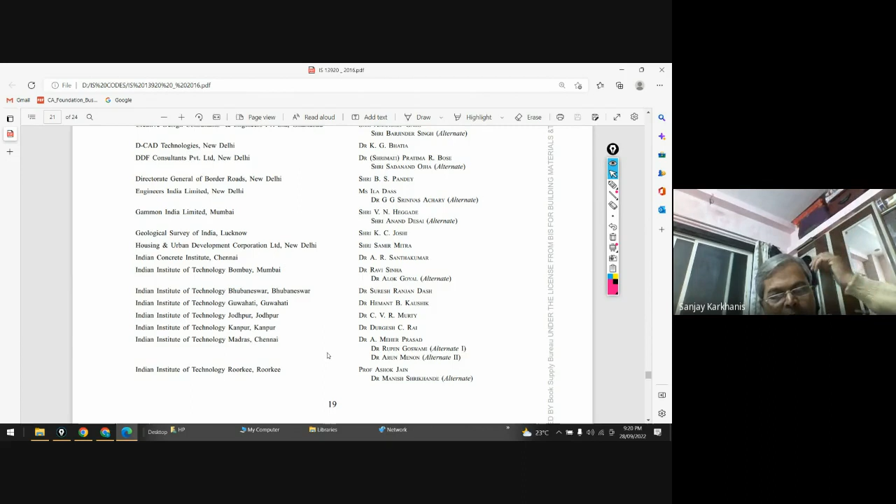Anyway, मैं इतना ही कहना चाहता हूँ कि these committee members are also from the reputed consulting firms from India. They are also from central government departments, military departments, and R&D people, then Survey of India people, urban development people. So IITs. So don't be under that impression कि कोड वालों को क्या मालूम कैसे डिजाइन करते हैं। Do you agree with me?

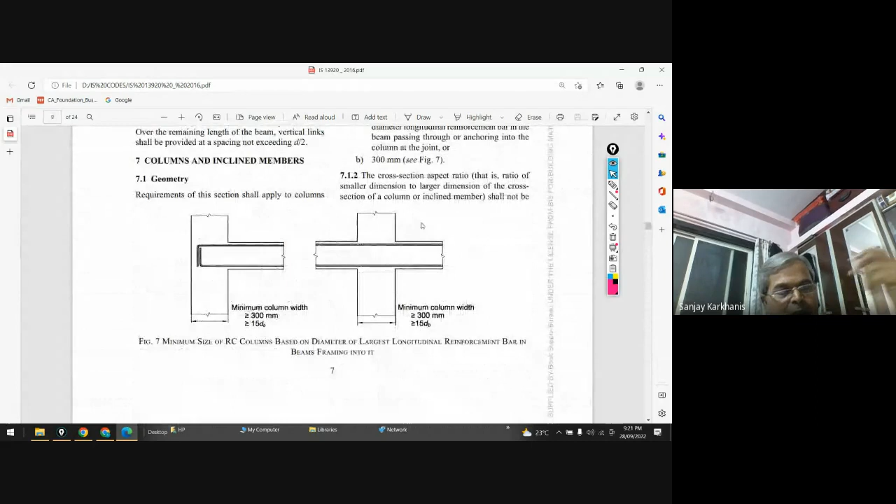Okay, we'll go through this in next session, and then we'll go with our practical model. But I think this was required. या ऐसा रीड किया था क्या? Anybody? Hello.

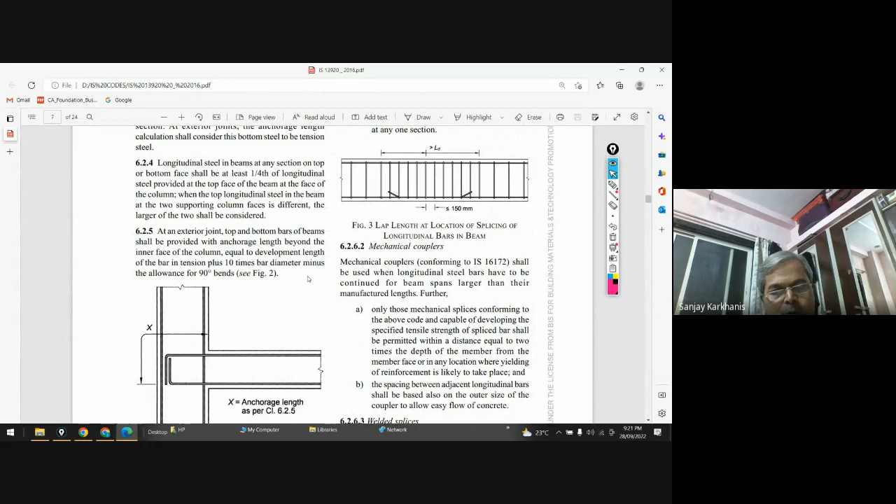That was actually the intention behind going through this codal provision. My intention was only that I want to create the eyes, how we can look at the things with positive aspect, not with that लोग कुछ भी कहते हैं यार. I don't agree with that.